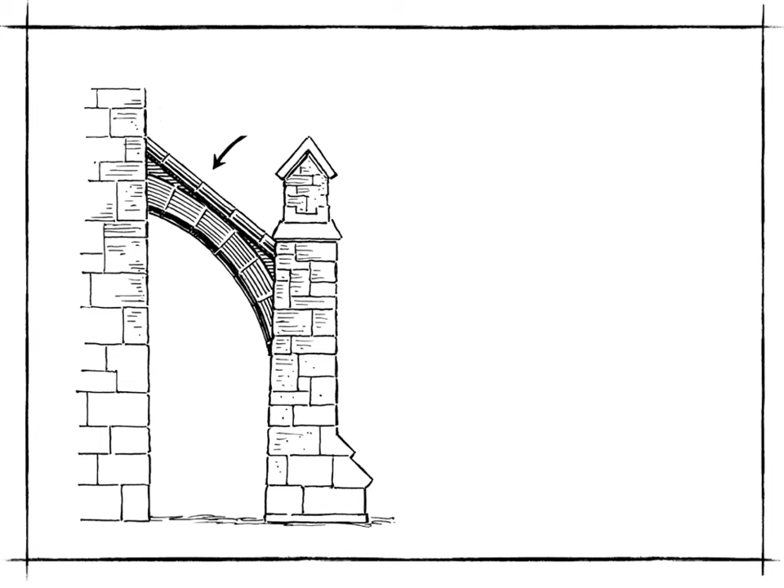When you start to create bigger open spaces, you could create weakness around the outside. So therefore, sometimes they're held up from the outside, and that's called a buttress or a flying buttress. The most popular flying buttress structure is Notre Dame Cathedral in Paris.

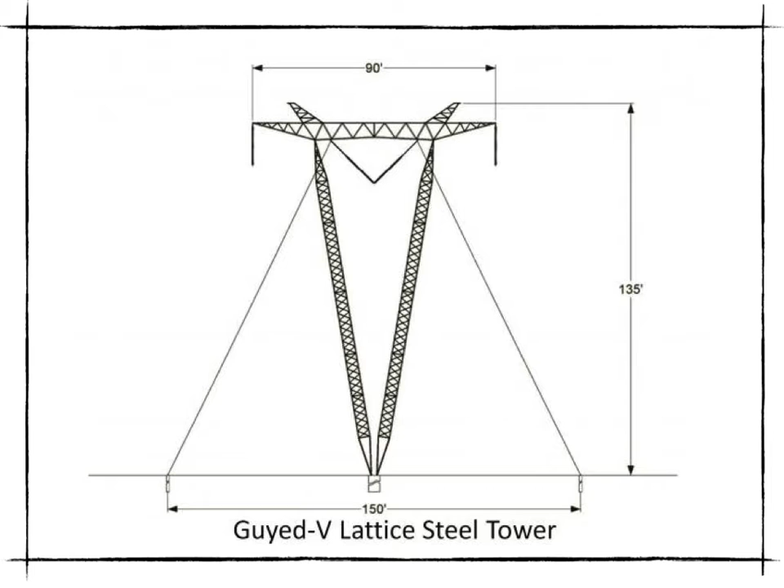If you want a really tall tower that cannot stand on its own, then you can hold it down with tension if you pull outward evenly from different directions. An example of a tension structure is a suspension bridge.

Okay, let's take a look at some simple structures, and you're going to create these using the materials that you have. First of all, use 4 drinking straws and tape to form a square. Stand the square on edge and apply downward force on top of it. The square deforms easily due to the weakness of the corner joints. Go ahead and pause the video and try creating a square. You can do it. You can create just one square as a group if you want.

The next shape you're going to create is a triangle. Make a triangle in the same manner using 3 straws and tape and test it as you did the square. The triangle won't change shape unless you push hard enough for either the joint or one of the straws to break. Pause it and try creating a triangle.

Fortunately, a 4-sided figure like a square can be changed into 2 triangles by connecting 2 opposite corners together. Add a rigid cross brace to the square and test it again. You're going to see this is much stronger. Go ahead and create that from your original square.

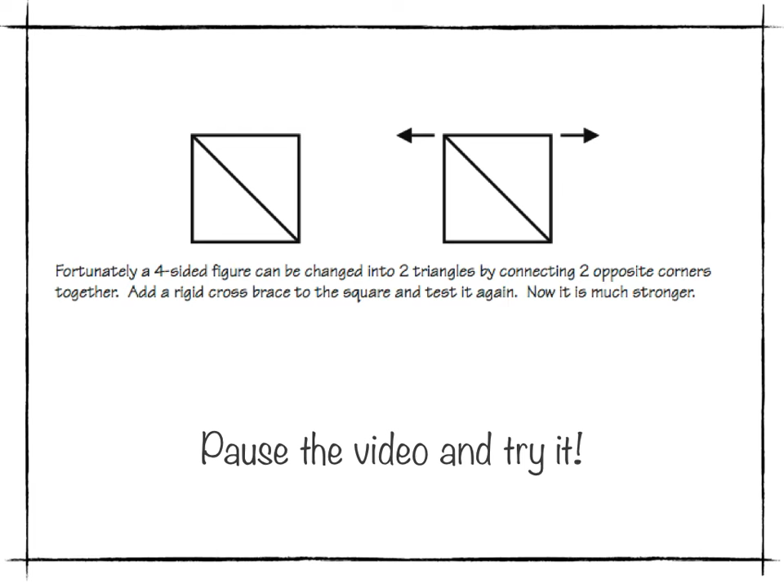Now let's take a look at creating 3D objects out of that. Use the squares and triangles as a base to form a pyramid and a cube, which will be used as the building blocks of your tower.

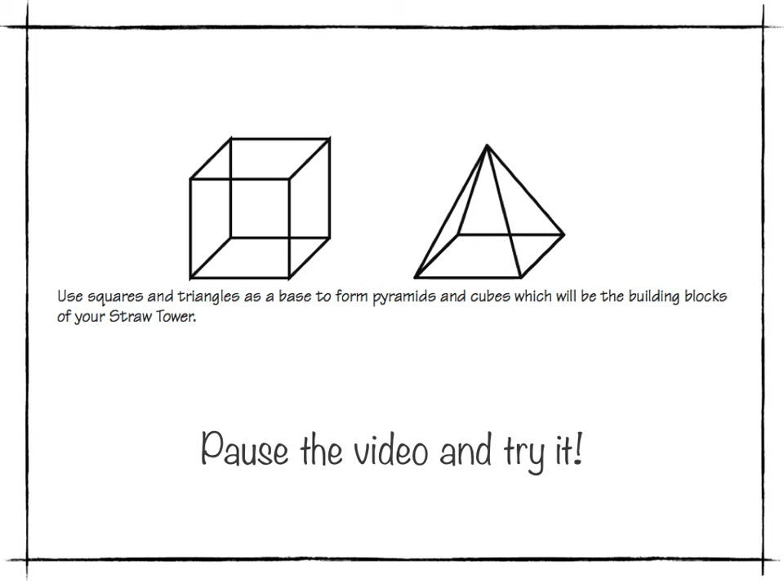Now there are different ways you can connect corners together. Let's take a look at the 3 different ways to connect corners. A place where 2 or more members are joined together is a joint. So first of all is the ever popular butt joint, where pieces butt together. They're joined end to end with, in this case, tape around them.